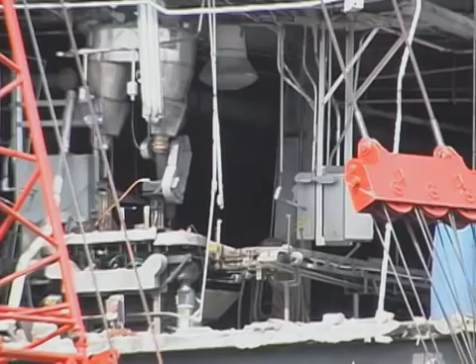Explosions raced through the buildings, fueled by accumulations of combustible sugar dust and sugar that had spilled from equipment. Thick concrete floors heaved up, and brick walls were blown into stairwells and work areas, blocking many exit routes. Fires spread rapidly.

8 workers died at the scene. 6 more died later at a regional burn center. Dozens of others were injured. The plant's massive sugar-packing buildings were a total loss.

The accident at Imperial Sugar was the deadliest industrial dust explosion in the United States in decades. It highlights the extremely serious nature of combustible dust hazards. There were significant accumulations of sugar dust and spilled granulated sugar on surfaces throughout this facility. Conditions were set for a catastrophic accident.

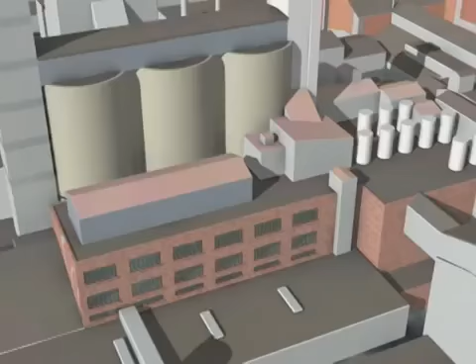Imperial Sugar's sprawling Port Wentworth complex began operations in 1917 and grew to become one of the largest sugar refining and packaging facilities in the U.S. Granulated sugar from the refinery was stored in 3 100-foot-tall silos and then conveyed into packing buildings where it was packaged for distribution. Granulated sugar was also converted into specialty products, such as brown sugar and powdered sugar.

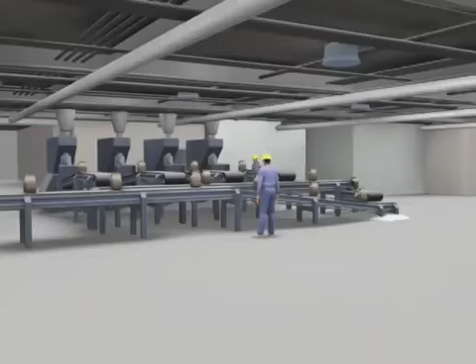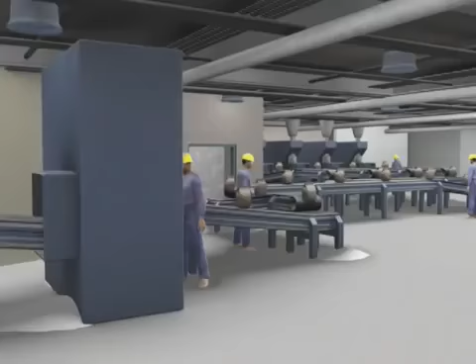Sugar was transported by a complex system of bucket elevators, screw conveyors, and conveyor belts. During this process, sugar spilled onto floors throughout the work area. In places, the spilled sugar was many inches deep.

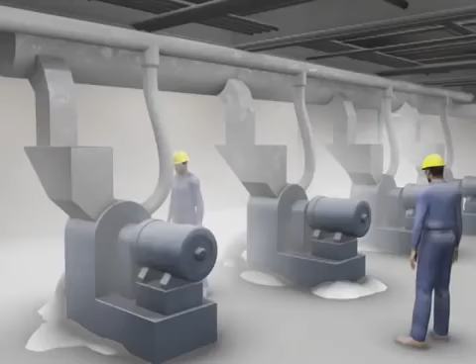This sugar also contained fine particles which became airborne. In addition, hammer mills were used to crush the granulated sugar into powdered sugar, creating even more dust. The machines were connected to a dust collection system, but it was undersized and in disrepair, and it was not connected to the bucket elevators and conveyors.

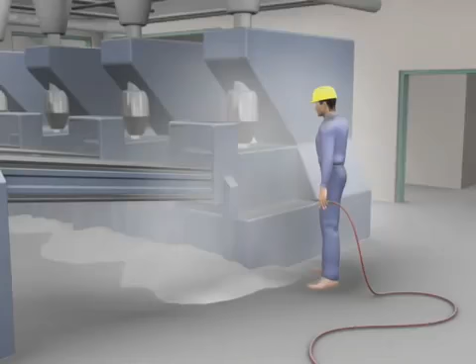Significant amounts of sugar dust escaped into the work areas. Workers routinely used compressed air to clean packaging machines, further dispersing sugar dust throughout the buildings. Over time, large amounts of dust accumulated on elevated, hard-to-clean surfaces, such as ducts, beams, and light fixtures. These surfaces were not cleaned often enough to always keep the dust below hazardous levels.

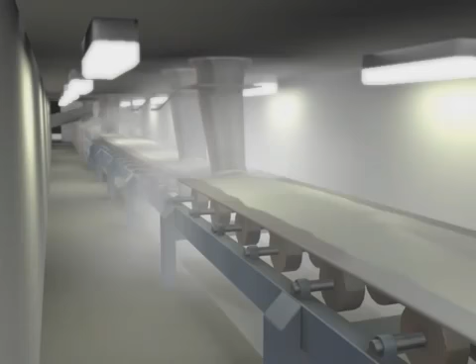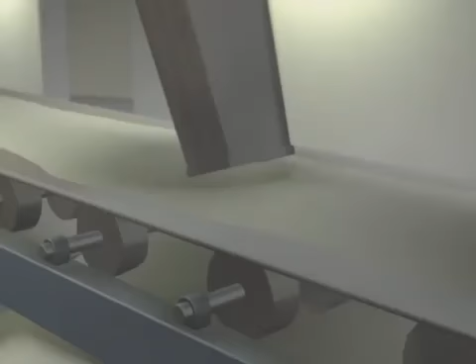In the tunnel beneath the sugar silos, granulated sugar flowed through chutes onto a long steel conveyor belt. From time to time, clumps of sugar would become stuck in one of the chutes, blocking the flow of sugar on the belt, spilling sugar onto the floor and releasing dust into the tunnel. But the tunnel was large and ventilated, so this airborne dust did not build up to explosive concentrations.

However, in 2007, the company enclosed the conveyor belt with stainless steel panels to protect the sugar from possible contamination. The enclosure was not equipped with a dust collection system. As a consequence, sugar dust would now be trapped inside this enclosure.

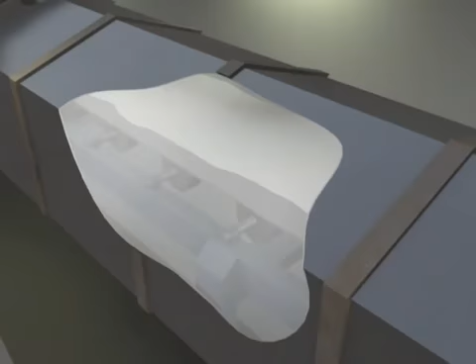On February 7, 2008, clumps of sugar were found blocking one of the discharge chutes. Sugar from the adjacent silo likely spilled off the moving belt. Dust likely accumulated to an explosive concentration inside the enclosure. At about 7:15 p.m., the sugar dust contacted a nearby ignition source, likely an overheated bearing, and exploded.

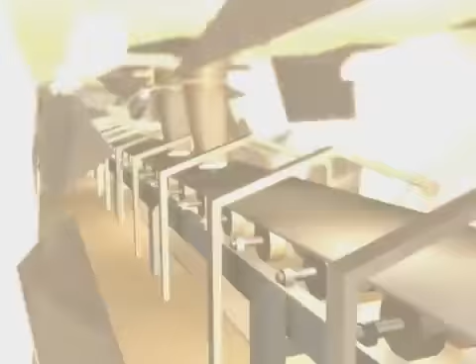This primary explosion blew apart the enclosure and vented into the packing building. Accumulated sugar was lofted and ignited by the advancing fireballs. The dust clouds fueled a chain reaction of secondary explosions, which swept through the buildings.

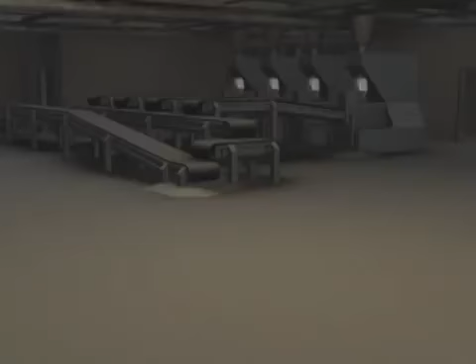Concrete floors buckled, releasing tons of granulated and powdered sugar into the flames. Emergency evacuation drills had not been conducted, and the explosions had cut the power to much of the interior lighting. In the maze of darkened and damaged stairwells and passageways, workers desperately tried to flee the growing inferno.

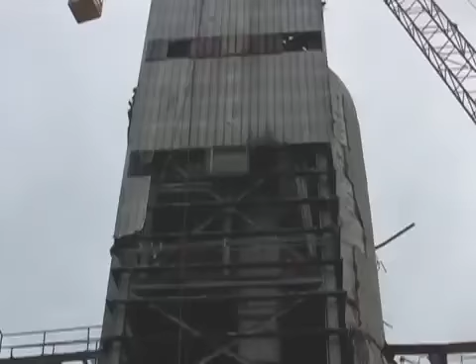The CSB found that correspondence dating back to the late 1950s showed that plant managers in Port Wentworth were aware of the explosive nature of sugar dust and the danger of dust accumulations. As far back as 1961, a memo described a sugar dust explosion that heavily damaged the powdered sugar mill room. Despite the long-standing awareness of the explosive nature of sugar dust, not enough was done to manage the hazard.

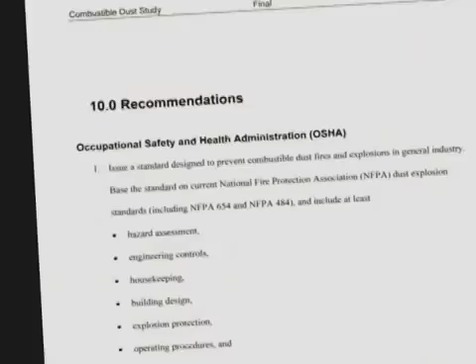In 2006, the CSB issued a study of combustible dust, which called on OSHA to establish a comprehensive combustible dust standard based on the current standards of the National Fire Protection Association, or NFPA.

In October 2007, OSHA began implementing a new national emphasis program to increase the enforcement of existing regulations related to combustible dust. Imperial Sugar learned of the OSHA Combustible Dust National Emphasis Program 4 months before the devastating explosion at Port Wentworth. But management did not act effectively to control the serious dust problem in the packing buildings.

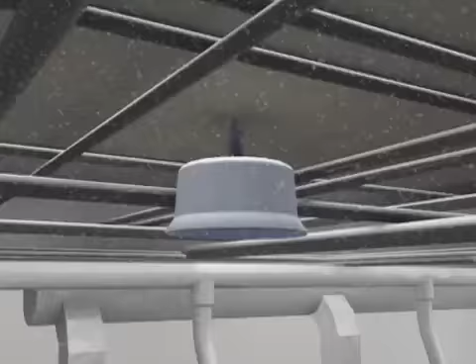Less than 2 months before the disaster, an internal inspection showed that many tons of sugar were still regularly spilling onto the floors. This provided much of the fuel for the massive secondary explosions and fires.

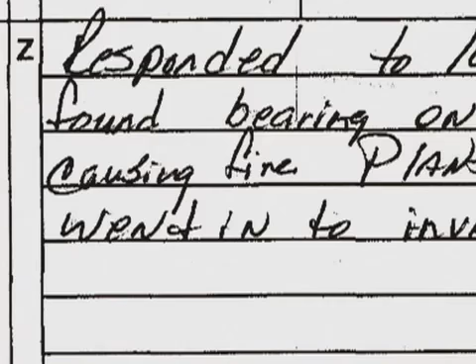The CSB found that over the years, the Port Wentworth facility periodically experienced small fires fueled by spilled sugar and accumulated dust on equipment. But none resulted in a sugar dust explosion that propagated through the plant. Investigators said that decades of operating without a catastrophic explosion may have lulled managers into complacency.

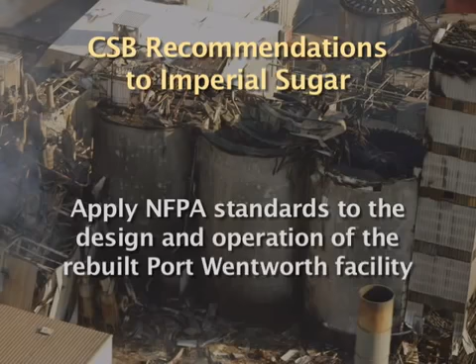In its report, the CSB issued the following recommendations to the Imperial Sugar Company: apply NFPA standards to the design and operation of the rebuilt Port Wentworth facility; develop and implement comprehensive combustible dust control, housekeeping, and training programs; and improve emergency evacuation policies and procedures.